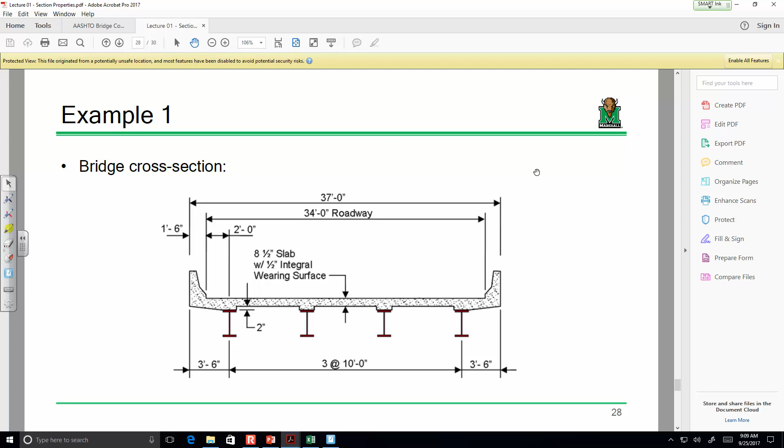Yeah. What were you saying though? Oh, no, that's fine. All right.

Now our span length, what we're going to use for span length is 90 feet. For your bridge, you can just use a different span length, but I think you'll see it's just literally changing one number. Everybody okay with this?

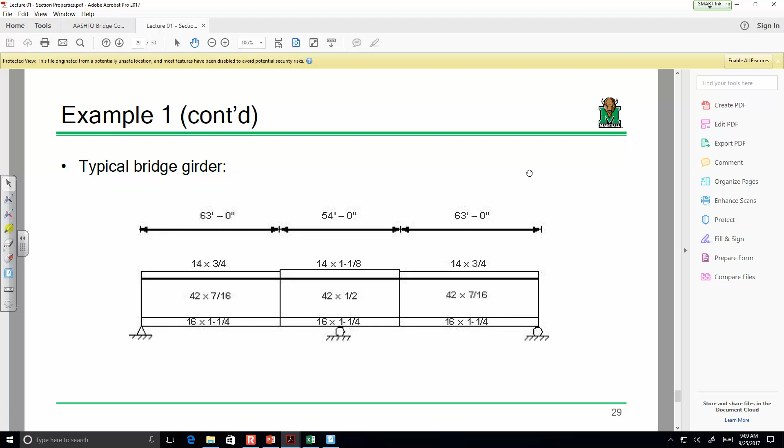All right, let's go ahead and do some basic example calcs. So some parameters: S is our girder spacing, and we always report that in feet, so the value we use is 10. L is our span length, which we always report in feet, so that's 90.

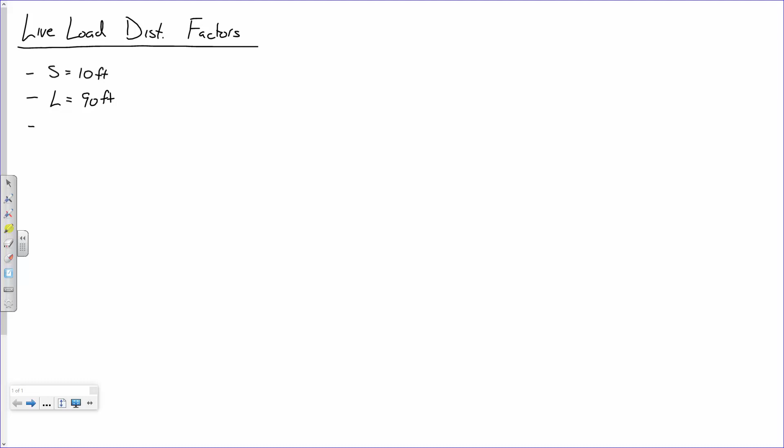Slab thickness, we say is 8 inches, and we always report that in inches. Now, one of the first things we're going to have to compute is what's called a longitudinal stiffness parameter.

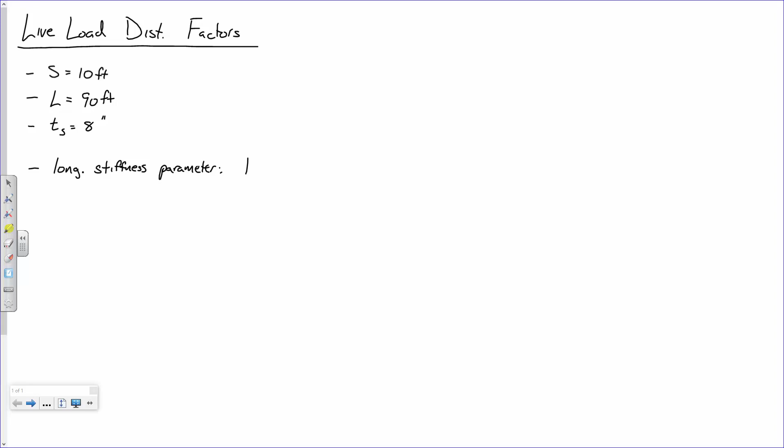That is kg. Now, the way we compute that is we say it's the modular ratio times the quantity I plus A times EG squared. We covered that in our last lecture, right? Didn't we mention that?

All right, help me out, let's see if you all remember this. What is our modular ratio going to be for this bridge? Does anybody remember this? Steel bridge, concrete deck? 8. Okay.

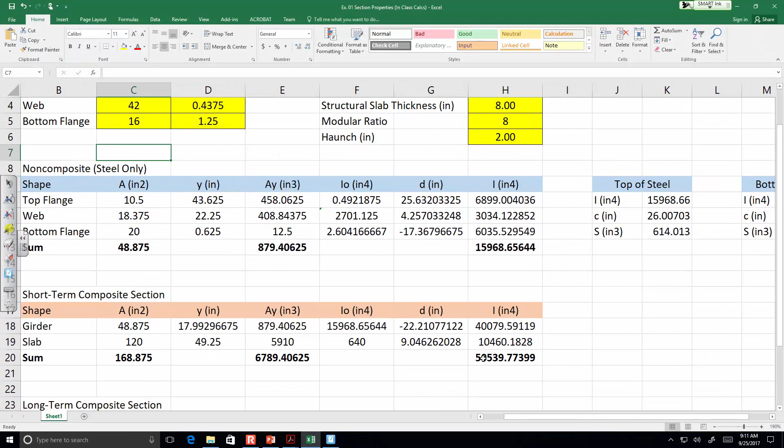Next thing we need is a moment of inertia. Now the moment of inertia is for just the steel by itself, which is what I pulled up here. Remember this calculation we did together, where we looked at the shapes, the top flange, web, bottom flange, and went and did our moment of inertia? Now the numbers I want to call to your attention are this and this.

Let me take this moment of inertia and switch it down a little bit. So our moment of inertia for the steel beam by itself was about 16,000 inches to the fourth. Everybody remember that? And our area is about 48.88 square inches.

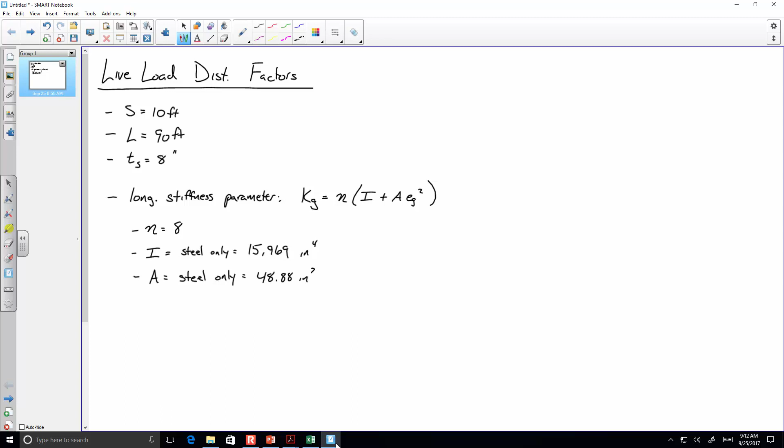So what I'm going to do is say 15,969 inches to the fourth, and our area is for the steel only, and that is 48.88 square inches.

Again, if you've got this set up in Excel, you can have it automatically reference all the values. I can guarantee you that what we do by hand and what you would do in Excel would be a little different. Everybody okay with this?

Now, EG takes a little bit of explanation. It's not that hard, it's just something to think about.

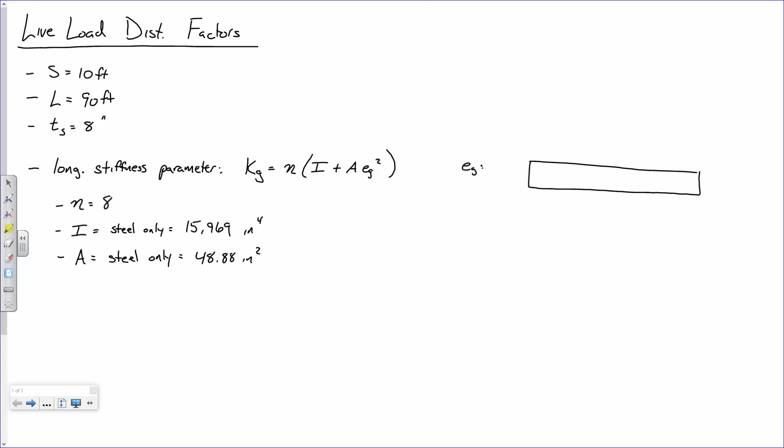Okay, now first thing I want to look at is this. I want to look at Y bar, specifically Y bar for just the steel beam by itself. Now how would I compute that?

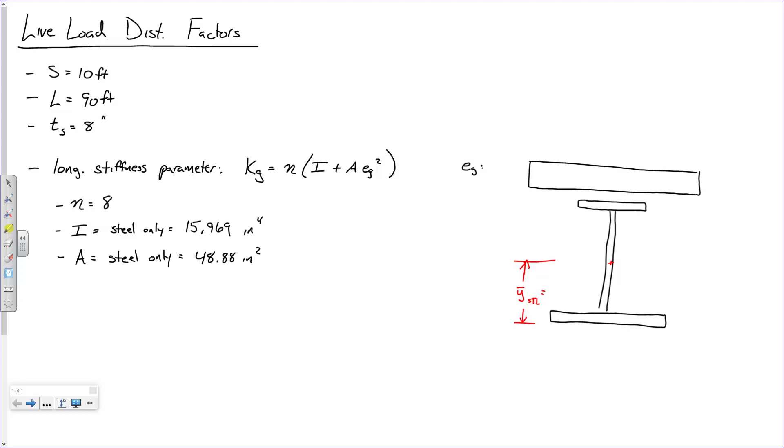I go to my spreadsheet, and I've kind of already got that computed here. Remember, it's just sum of AY over sum of A. If I take those and divide that out, I get about 17.99 inches. So we'll say this is 17.99 inches.

Okay, the next thing I want to compute is this. Specifically, this is the distance from the bottom of the girder to the center of the deck. So tell me, how do I compute this?

What do I add? Okay, hold on. Now you're saying y bar times 2, but you're assuming that the girder is symmetric. It's not. The bottom flange was bigger than the top flange, so y bar times 2 won't get you all the way to the top.

Let's just think about this from a dimension standpoint. If I start here, how do I get from here to here? Thickness of the bottom flange, right? Depth of the web, the haunch, right? Because the haunch already includes that, and then half that. Make sense? So I propose you take the thickness of your bottom flange, add the depth, add the haunch, and add half the slab thickness.

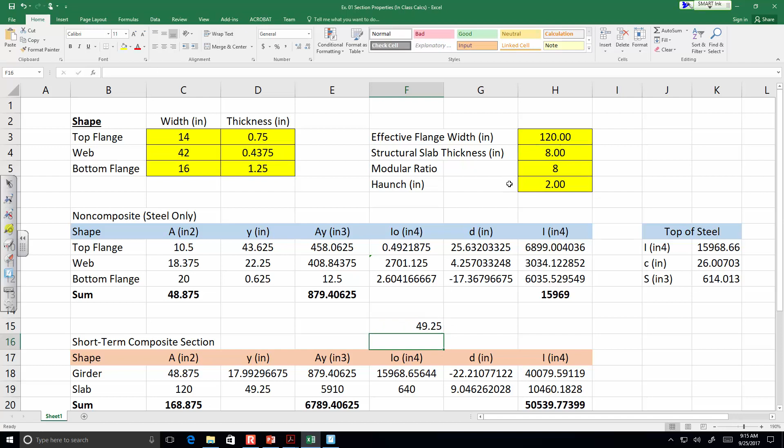So what do we get? That plus that plus that plus that, divided by 2. 49.25. Everybody okay with that? So far so good?

If you're okay with that, then I propose that this distance right here is EG. So how am I going to compute EG? Just the difference of those two, right? And what is that? It's too early for me as well. About 32... 26. Did I do that right?

31.26. Dang it, I was close. My caffeine hasn't kicked in either. So, therefore, EG is 31.26.

So if you've got all these, kg equals 8 times 15,969 plus 48.88, that's inches, times 31.26 inches squared. Now, don't worry, it comes out big. kg is a really big number.

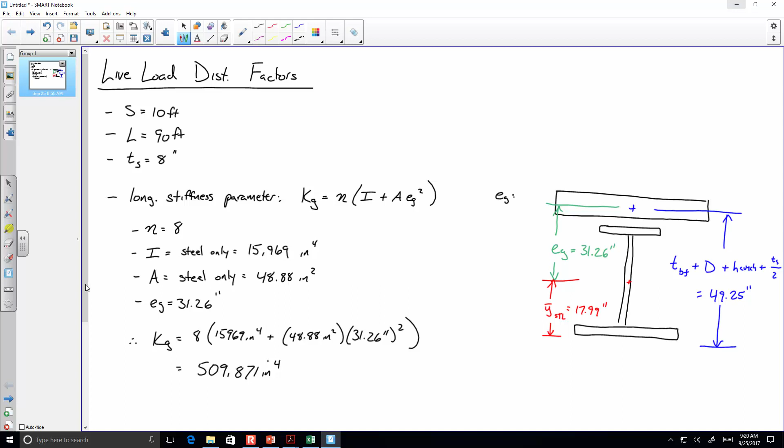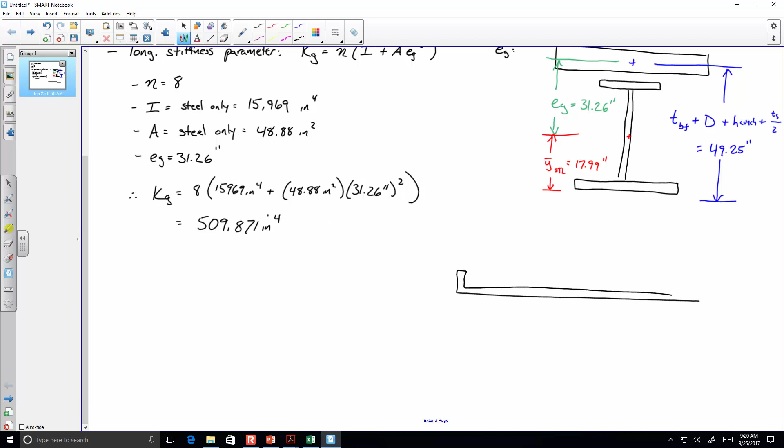It's kind of like an integral pier cap in a way. So you've got, like, here's your cross section, and then you've got that. But then at the pier, you've got this massive beam like that, and then there's piers that go down, kind of like that. Is that what you're talking about?

I'll tell you, it's kind of interesting. It's really a way to get around clearance requirements. So instead of a hip-bone-connected-to-the-leg-bone type philosophy, where the girder sits on the pier cap, which sits on the pier, which sits in the ground, instead you're actually creating what's called an integral pier cap. In this case, it's a steel pier cap where the girders actually frame into this massive box section, and then that goes into the piers. The advantage is that instead of having your pier cap sit below the girders, it's sitting right here, so you get more room under the bridge.

There was an expansion, I'm trying to remember where it is—it was around the Richmond area, the massive interstate expansion. I think it was Richmond, don't quote me on that. But the interstate corridor through the Richmond area, they did a lot of expansion, and those bridges were all over the place, mostly because of clearance issues.

They're pretty nifty though. But the actual box section has some very interesting design because it's not a very long thing—this red part, that's a beam like any other, okay? But the thing is, it's not a very long beam, but it is subjected to phenomenal amounts of shear. Oh yes, because it's in that small space, you've got a lot of shear, since the whole damn bridge is sitting on that. You've got a lot of shear and a lot of moment in that particular location, so it gets kind of interesting. That one transfer beam is far larger than the main girders of the bridge.

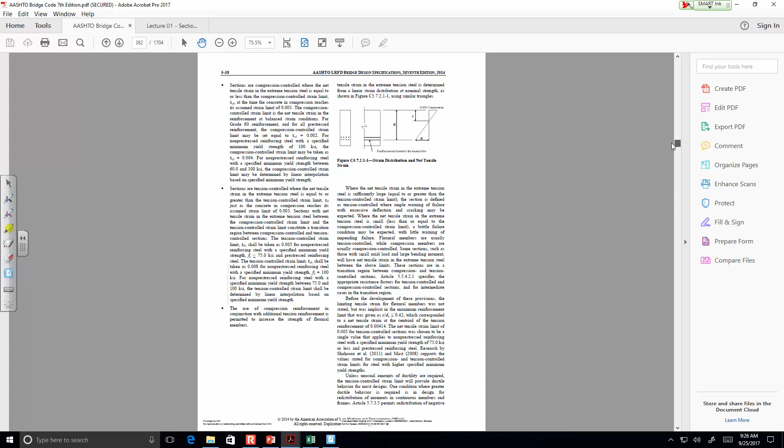Okay, let's get back to some distribution factors. Everybody good so far? Okay. I want to go back to the spec so you see what I'm doing specifically, because I know I threw a lot of tech at you last time. I'm in chapter... well, I want to be in chapter 4. That's chapter 5. Come on.

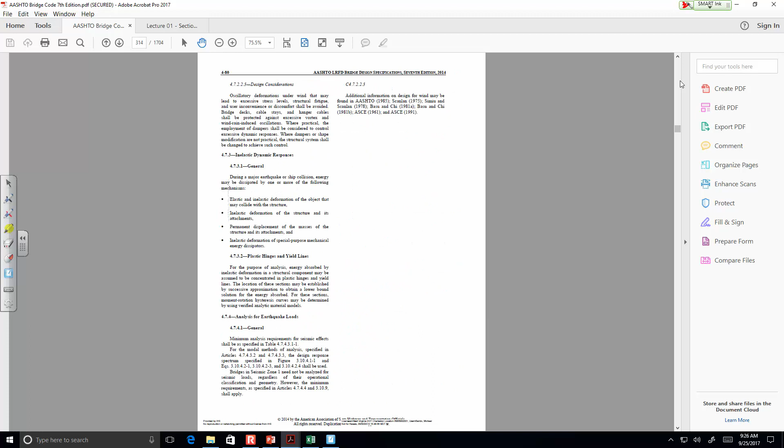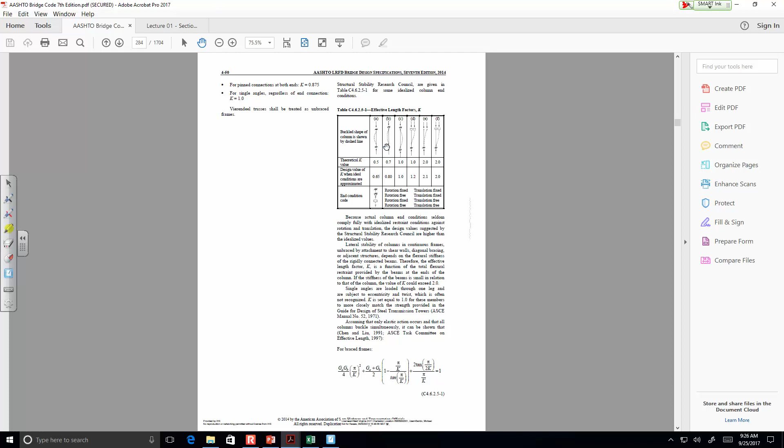I know it's been a while since you've seen these, right? Oh, of course it freezes. Well, there's effective length factors. Oh, there we go, okay.

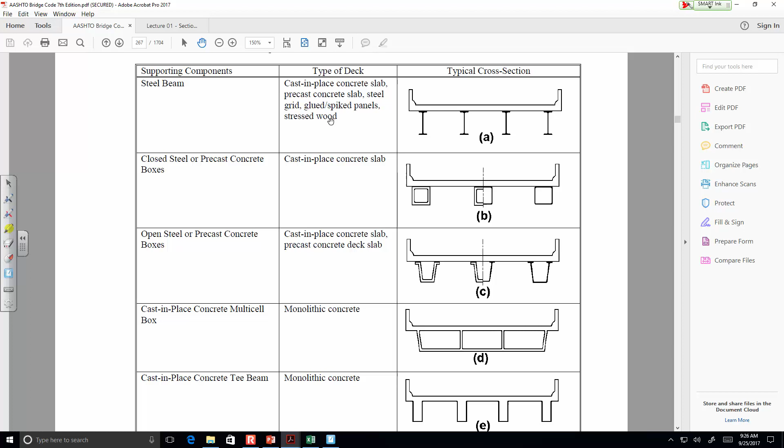So the first thing we do is identify our cross-section. We're obviously dealing with cross-section A, right, steel beam, concrete deck. We go through our tables one at a time. The first one is moment in interior beams. Let's go down the list: cross-section A, reinforced concrete slab on steel or concrete beams. So this is obviously going to be our case.

Let's look at our range of applicability. Does our girder spacing fall within this range? Yeah, it's 10. Does our span length fall within the range? Our slab thickness, number of beams, what about Kg? We've got a Kg of 500,000 something, that falls within the range.

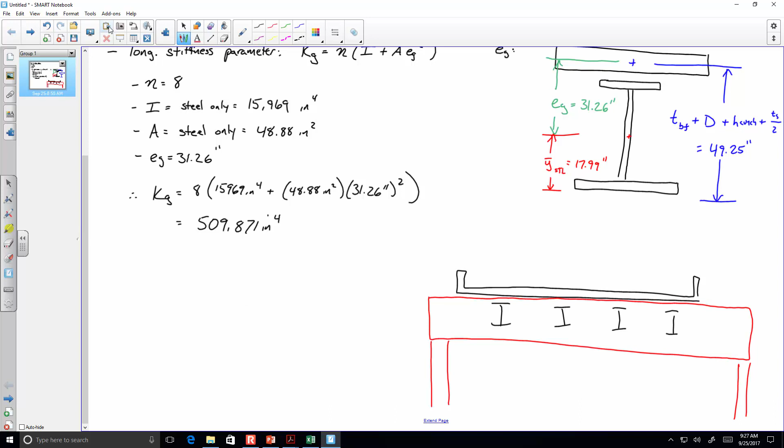So here are our distribution factors. Now these are for moment and for interior beams only. So, all right, moment: our distribution factor for one-lane-loaded scenarios is this.

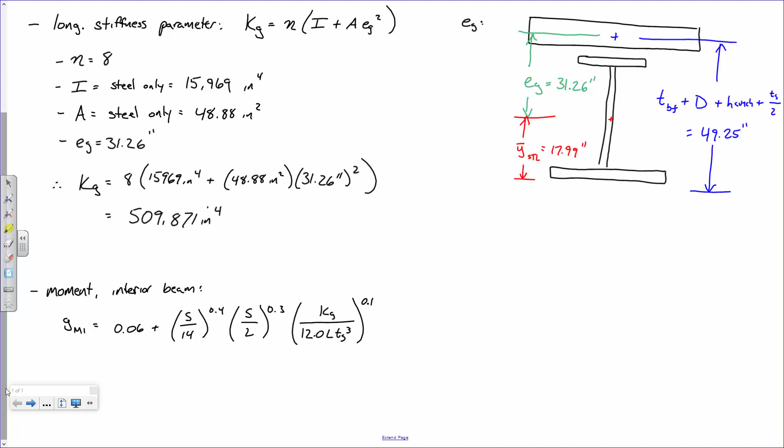Now these are exponents, just a heads up. I'm going to leave units off for brevity, because the units have already been factored into the equation: 0.06 plus (10/14)^0.4, (10/90)^0.3, and then 509,871 over (12 times 90 times 8 cubed), to the 0.1. I'll give you all a second, let's see what you can come up with.

You all can do calcs. I'm going to see what's going on outside.

Now they're lifting some panels.

This might seem like a futile exercise, like an example problem from a graduate class before, and everybody, because of the exponents and the size of the equation, it can get a little funky.

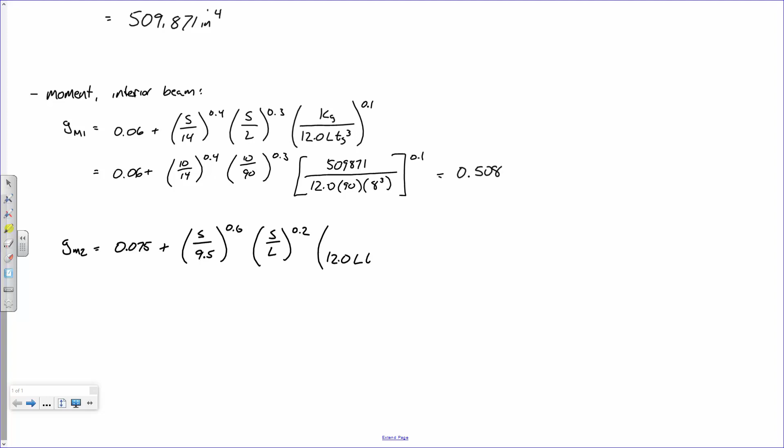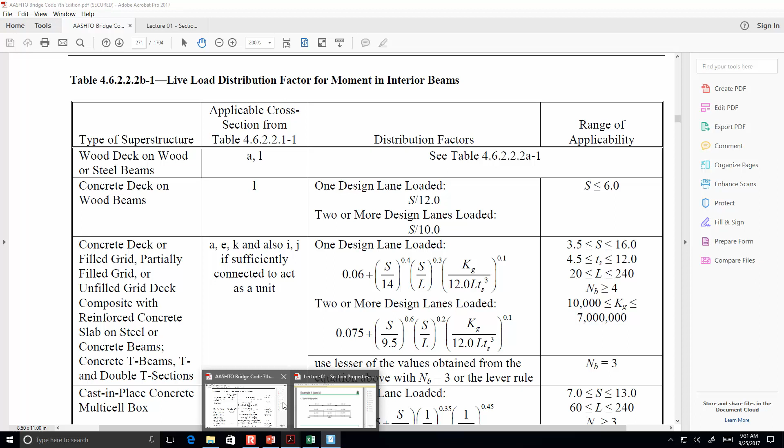It's 9.5, that's S, not 5. Well, I'll be honest, it's where my master's thesis was on this. These are the ones that have been burned into my memory. Now, I think I got the exponents right on that one. My master's thesis was on 1-lane loaded scenarios, so those are the ones I really remember. And it was on moment, so that's what my topic was.

So I'm not going to do the numbers. You all can probably recall that in your calculator and just change a couple constants.

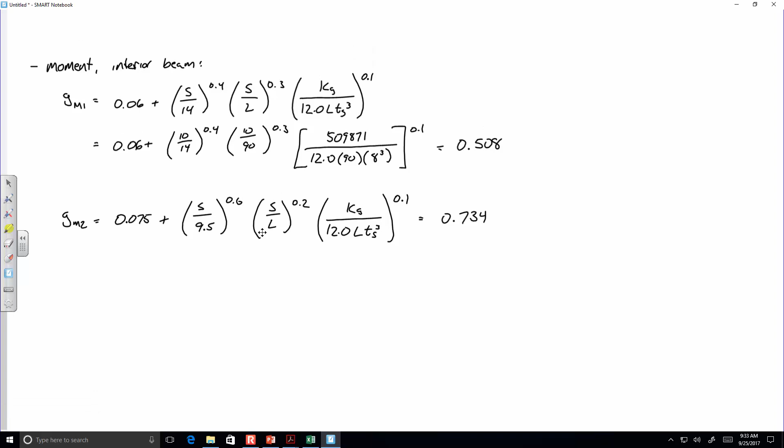0.734. Goodness, pen got away from me. Everybody okay with that? I know the equations are a little funky, so it's just something to keep in mind. So these are moment interior beam distribution factors. Now our next one in the code, let's take it down the line.

Moment exterior beams, okay? This is where the lever rule comes into play. Let me explain how the lever rule works.

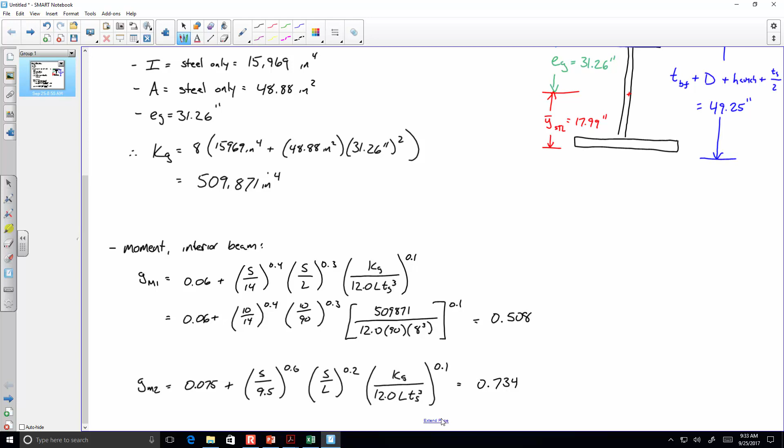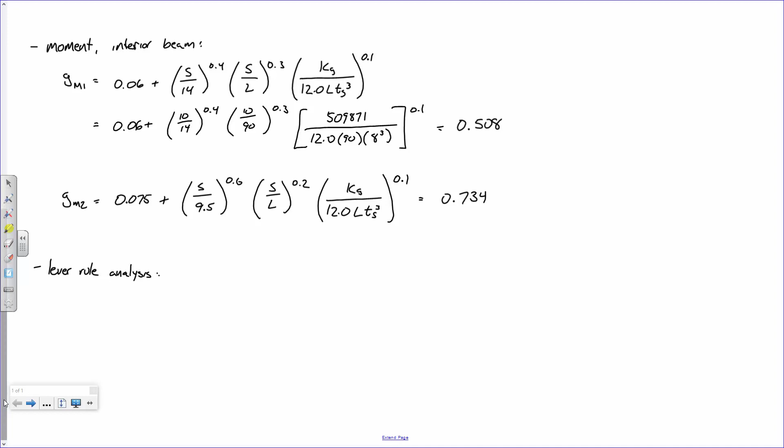I'm actually just going to do a lever rule analysis right now. Now, if there's one thing I would change about this bridge, it would be the width of the barrier. I don't really like it, and you're going to see why right now.

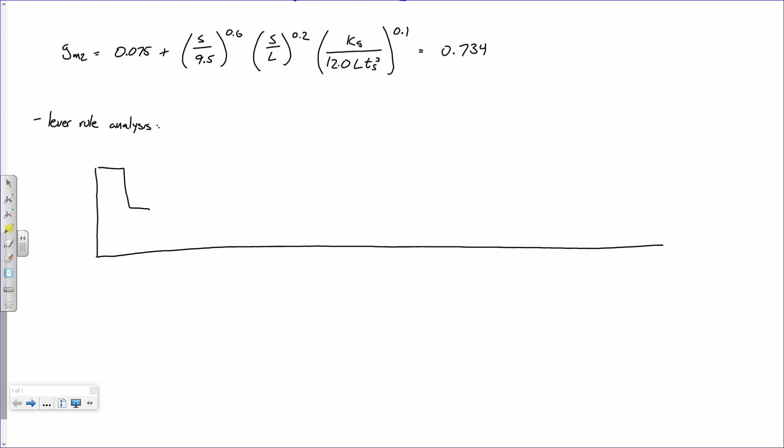Now, this barrier is 18 inches wide. When you perform a lever rule analysis, you're trying to maximize the effect on the girder of interest. We're going to be using the lever rule for exterior beams, the ones on the outside. So worst case scenario, I'm going to take that truck and shove it as far over as I can. The farther I push this truck towards the barrier, the worse the effect is on this exterior beam.

Now, the code stipulates that the closest a truck can be placed for analysis purposes is such that I've got one load here and one load here. This is half the truck, this is half the truck. The code stipulates that this distance here shall be no less than 2 feet, or 24 inches. Everybody okay with that? Now, pop quiz, what is this distance? See if everybody remembers that. It's not 8, it's 6 feet, or 72 inches. The distance between your axles on the truck is 6 feet.

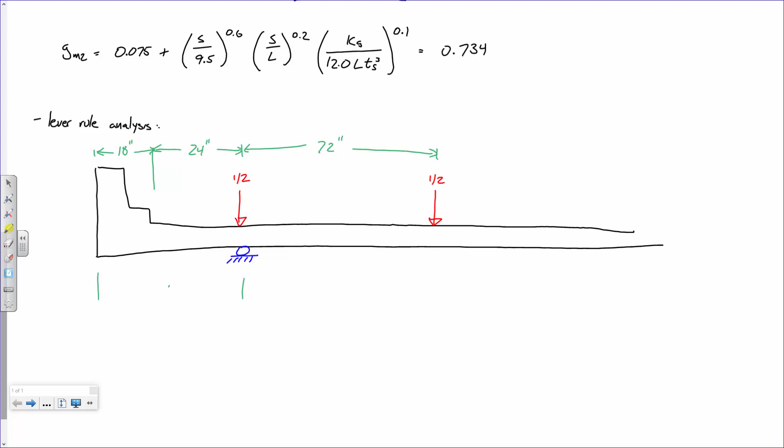Now, what's the girder spacing? 10 foot? So our next girder is somewhere out here. The way we sort of draw that is we do this, something like that. And this dimension is 120 inches. The question we're asking is, based on this scenario, what is that reaction?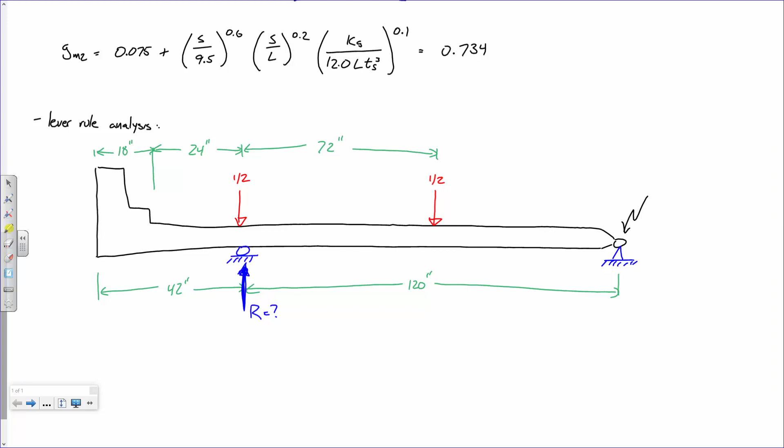So I propose that if you sum moments right there, you can determine what that reaction is pretty easily. So sum moments. Y'all remember this, right? Summing moments at the hinge, what do I have? I have R times 120 going like that. So we'll have R times 120.

That's the closest it can be, it can't be right up on it. Well, two reasons. One, and this is going to seem like a cop-out, but it really is just a code specification. But two, we are talking, let's just look at physical trucks. There is a difference between the center line of the wheel and where the edge of the truck is. You see what I mean? The center line of the wheel does not occur right along the edge of the truck. There's a space. You can just pull up any image and see that.

Yes, exactly, yeah. Make sense? Even if the truck was driving along the bridge and sparks were flying because it was rubbing right up against the barrier, rubbing right up against the barrier, the point of contact with the barrier and where the center line of the wheel is, there's a gap.

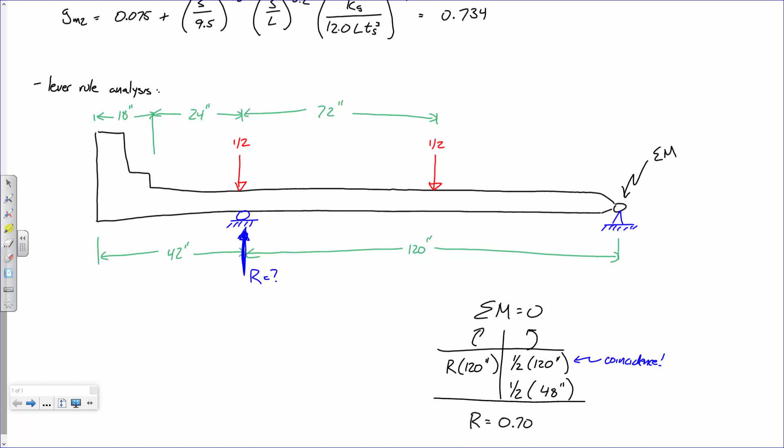Does that make sense? Okay, so far so good? Now, if you open up the code and it says, okay, what's the distribution factor, it says use a lever rule, right? So is our distribution factor 0.7?

No, it's not. The reason why is this. Okay, and I'm going to pull up the notes.

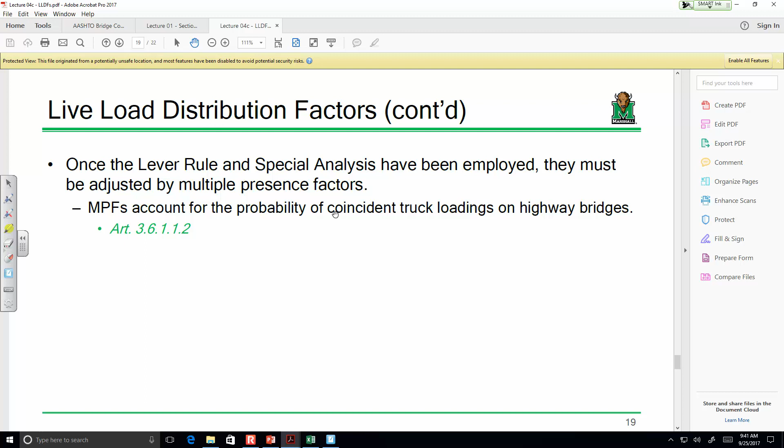All right, once the lever rule has been employed, we have to adjust those by multiple presence factors. I mentioned these near the very end of the lecture last time, but multiple presence factors account for the probability of coincident truck loadings. Like if you have a truck in the worst case scenario at a particular location on the bridge, what's the probability that there's load in the other lane?

If you've got a 2 or 3 lane bridge and you only have 1 lane loaded, what's the probability that there's load in the other lane? It's pretty high. But if you've got 3 lanes loaded simultaneously, what's the probability of that occurring? Well, it's pretty low. So let's go back to our discussion.

We're looking at moment in exterior beams. Okay, 1 lane loaded scenario is said to use the lever rule. So what I'm going to do is take the lever rule, and since it's a 1 lane loaded scenario, what am I going to multiply it by? 1.2. Okay, so just keep that in mind.

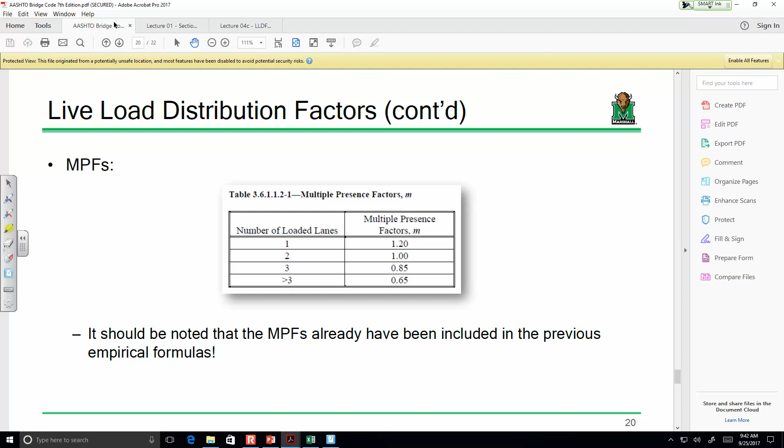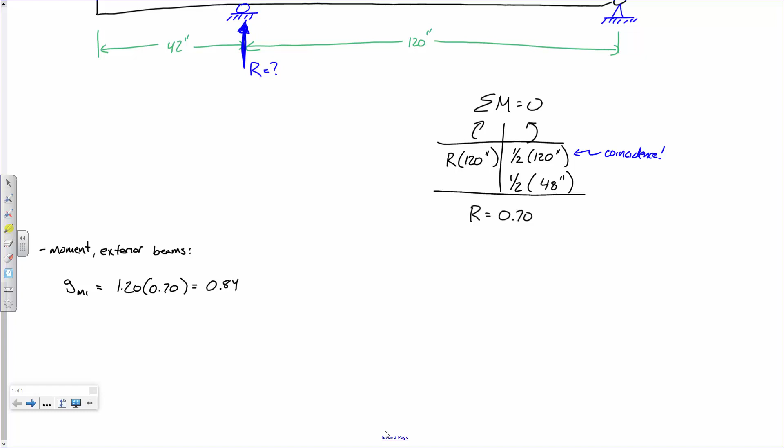All right, so open up the spec, distribution factor, moment, exterior beams, 1 design lane loaded, lever rule. So go into here. So our 1 lane loaded scenario is that. And that's it, that's your 1 lane loaded scenario.

Your 2 lane loaded scenario, let's look right here. So 1 lane loaded scenario, lever rule. 2 lane loaded scenario, we've got something a little interesting. What we do is we take the distribution factor for the interior beam and we adjust it by this following factor. So let's take a look at that.

We take some adjustment factor times this. Now, first off, that adjustment factor is 0.77 plus DE over 9.1. Okay? Everybody see where I'm getting that? Just right there.

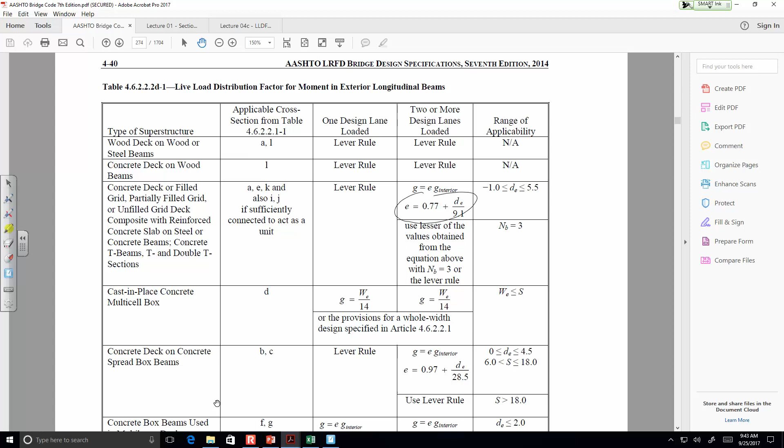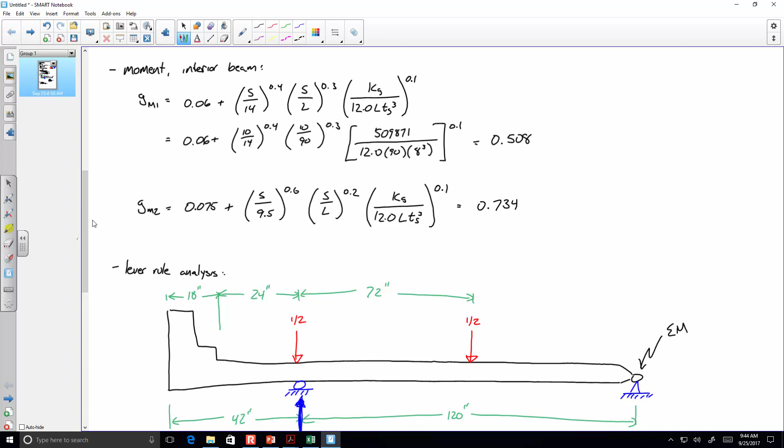Now this one's an easy one. For the interior girder, we have two distribution factors that we can use, 0.508 or 0.734. Which one do we use? Worst case scenario. So far, so good? Not too bad, right?

Okay, the only thing that is of confusion is this DE. DE is the distance from the center line of the exterior beam to the edge of the barrier or the curb. And it's in feet.

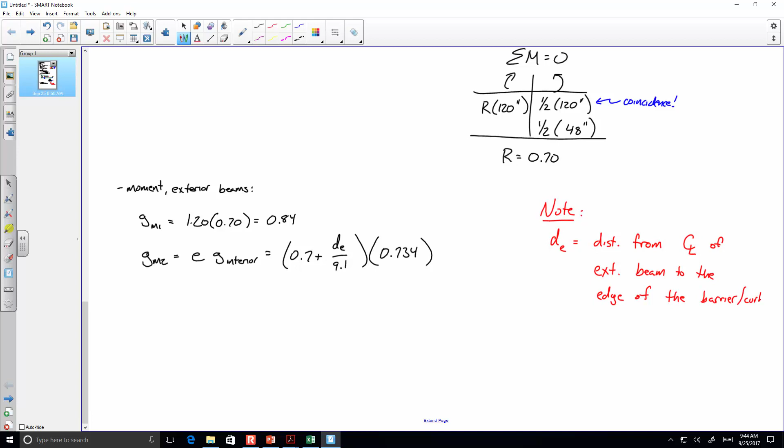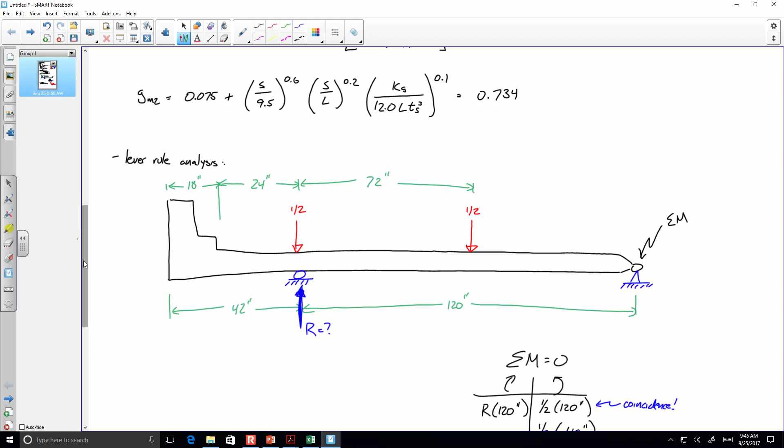So you tell me, what is that distance going to be for this bridge? From the edge of the barrier to the center of the beam in feet. 2 feet, right? We're going from edge, so it's 2 feet. So that's 2 feet.

So what is that? That's an easy one. 0.675. Do I have a second on that?

So now we haven't talked about special analysis yet, and I'll put that to the side. Let me ask you a question. If you were designing beams, what's your worst case distribution factor?

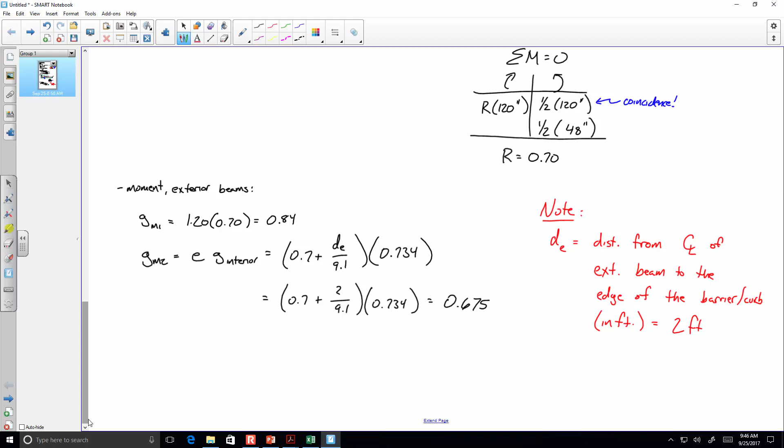0.84. The 0.84, this one was even larger than the interior beams, right? So what I would do is, if I was a designer for a bridge like this, I would say, well, let's just design all the beams using a distribution factor of 0.84, and then we'll just use that same beam everywhere. It's a lot easier, okay?

Good? Okay, it's 9:46, I think I'm going to call it. We'll look at shear next time. Shear's a lot easier, it will go by quick. What isn't going to go by quick is special analysis, that one's a little unique. It's basically loads on pile groups, but we will handle that on Wednesday.

After that, I don't want to keep harping on this, but I really want you all to think about what it is you need to cover from here on out to get you moving towards your project. Because what I've tried to do is cover the stuff that I think would be really difficult to figure out independently, but we are getting to a point where it's a big road trip, and it's time for you all to take the wheel. So, sound good?